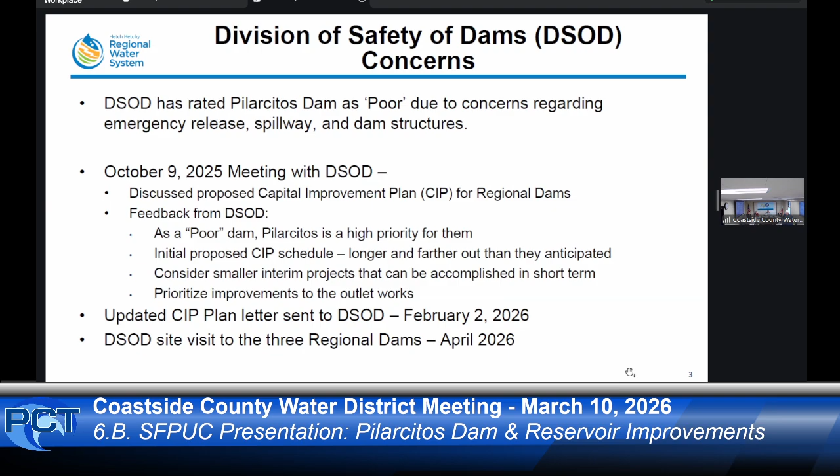You don't have a particular interest in San Andreas, but it's basically in the hills above Millbrae and Burlingame. The only way we can move water out of that is through what we call a blow off, which means it goes into the urban creeks down there. So we think we should do a project there, but it's going to be a small project because you can't put that much water down through the urban areas on that side.

For the Pilarcitos Dam Outlet Works retrofit project, I'll talk about that in a little more detail in a second. On the Turner Dam, we actually have to do some additional studies to get information there. But you see for the Pilarcitos Dam Outlet Works retrofit project, it talks about a 7-year timeline to get to construction, and I'll address that in the next slide, because even that feels like a long time. But capital projects do take a long time in many cases, so we have to deal with that.

The long-term projects stretch out all the way to 2052. That's the nature of our capital program at this point in time, part of trying to keep our rates affordable for all of our customers, including all the wholesale customers and the retail customers in San Francisco. Next slide, please.

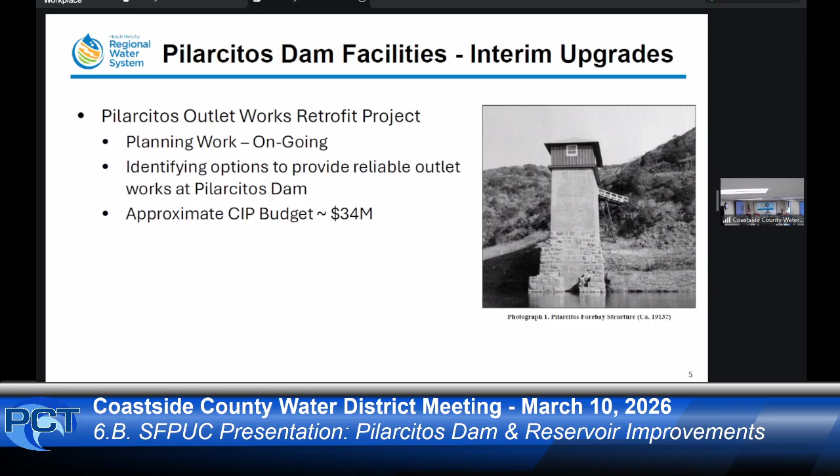For the whole long-term project, we are in the planning phase. We are evaluating the downstream conditions, because downstream of Pilarcitos is Stone Dam. So the operation of our dam or both our dams, operating Pilarcitos in conjunction with Stone Dam, is a key part of this in terms of stewardship of Pilarcitos Creek, so we need to take that into account.

We've got two basic alternatives that we have developed for Pilarcitos. One, which is the preferred alternative for us, is basically to accept a permanent reservoir restriction of some sort. Right now, the water level is restricted by about 20 feet. It can go up during wet weather, but you have to bring it back down to 20 feet lower than normal.

So we would accept some kind of restriction on the reservoir level. We would lower the spillway, and we would have this new discharge outlet to Pilarcitos Creek, which is what I was talking about as the interim project. The approximate budget for that would be about $190 million. That would have the least construction on the dam, since dam construction is the most expensive part of these projects—so this would have minimal construction cost relative to any work on the dam, because it'd be restricted to the spillway area.

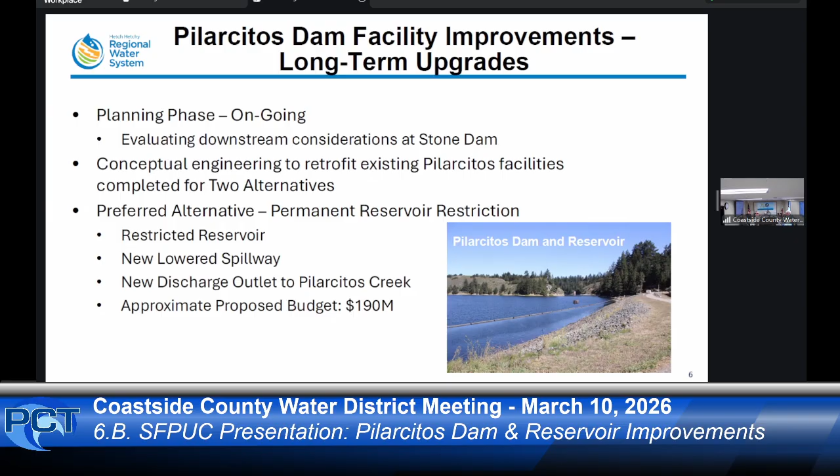The second alternative is basically new facilities—a new dam embankment, a new enlarged spillway, and again the same outlet works through the dam abutment.

So the approximate budget for that is in excess of $350 million. When you're rebuilding a dam, it gets really expensive. We had experience with that recently with Calaveras Dam, where we had to rebuild the dam, and that was a very expensive project. We're quite happy it's done, but it took a lot out of us in terms of money, time, and energy.

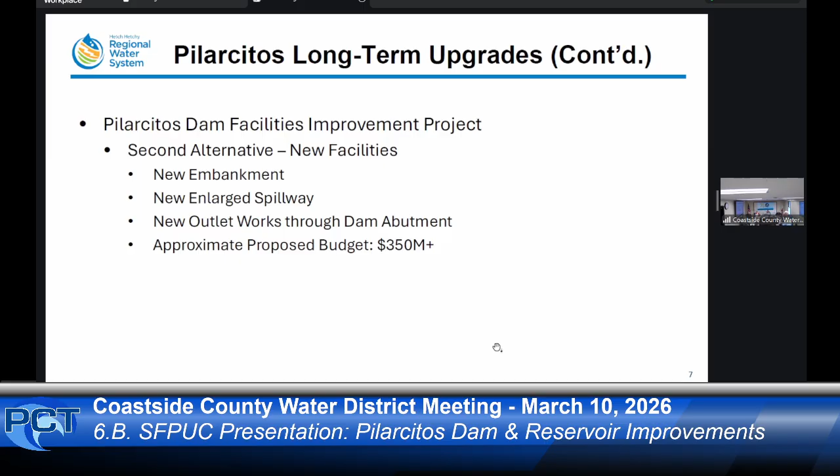I think we're going to know a bit more after we have the DSOD folks down in April to look at these facilities and talk through our proposal and the alternatives with them. Hopefully we will get to a place where we can move forward and take action as soon as we can on the new outlet works and move on to the bigger project overall.

Current operations, we currently have the restricted reservoir elevation. If we can get the outlet work cleared up, we might get some relief on that, but it's not going to be total. So we're going to be living with the restriction for as long as it takes to get the bigger project done. I think we've done a good job so far in improving the two siphons there for stream releases.

We're hopeful that will continue to serve us well as we go forward. You can see the two parallel pipelines go out into the reservoir, then come over to the spillway, go down the spillway, and dump into the creek down there. That seems to be working.

We have been in contact a lot with National Marine Fisheries Service, and they seem satisfied currently with the way the operation is going. So I think we're in a relatively good position for environmental review as well, but that's always a bit of a crapshoot as you move forward. That's the last slide.

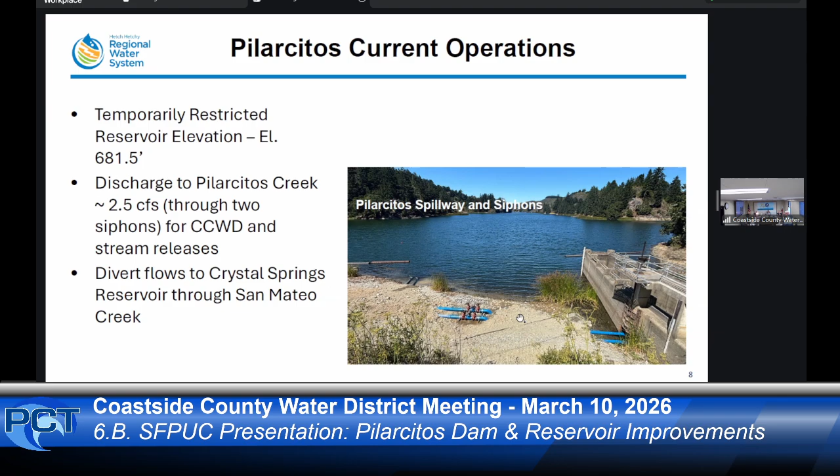Happy to answer any questions. Are there any questions, please, from the board?

The historical significance of the Leaning Tower of Torrecitos, as you might call it — was that determined by an architectural group, or how does that appear? Is that just someone looking at it, or?

In the world that we deal with, anything older than 50 years is historic. So I think the board is primarily historic, I think we're all historic. But those are the things that we have to deal with.

The structure was built in 1913 by the Spring Valley Water Company. I think all of our assessments would clearly put it into the category of a historic structure that would cause us to need to consult with the State Historic Preservation Officer.

The construction of that particular tower really predates formal engineering — it sort of looks like the masons showed up and mixed up some mortar. And it looks like it did, but it survived... well, it didn't survive the '06 earthquake. It survived the '89 earthquake.

One of the things I did ask one of our folks just yesterday was, if the outlet is down at the bottom of that, what's the point of the tower? She didn't have an answer off the top of her head, but I'm still pressed on that. I think it's sort of a fish review station, isn't it? I don't know.

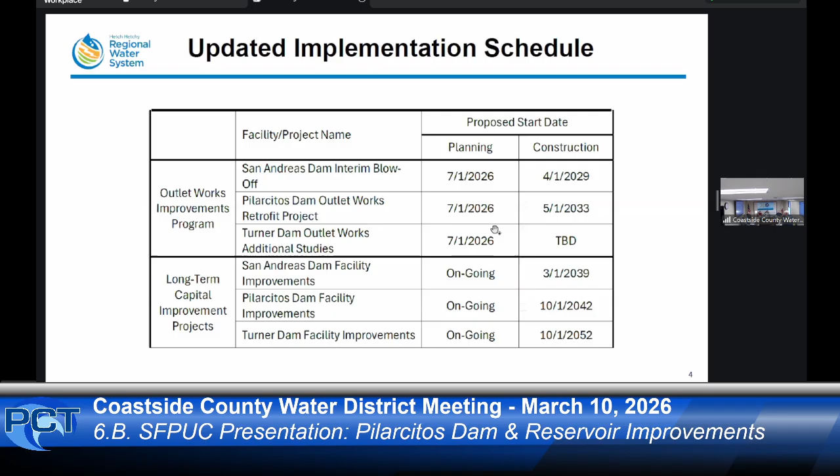Okay, and looking at the expenditures, being the BAWSCA representative, what are other BAWSCA members saying about this, do they have an opinion on the expenditure? No one has expressed an opinion on this expenditure to me. I see the case that could be made, and I'll leave it at that. Oh yeah, no, I think there's a real clear question of who's gonna benefit from this and how's it gonna work out, things like that.

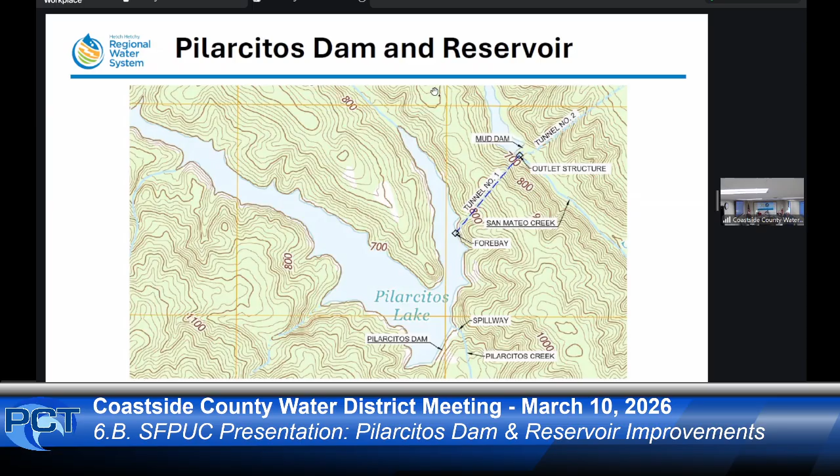There are two aspects to that. One, it's hard to tell, because they haven't seen all these things. Everybody knows it always makes a difference to see something in the flesh as opposed to just on an 8.5 by 11 sheet of paper. I took some of our commissioners up to see Mountain Tunnel, and all they'd seen was on a sheet of paper. When they got up there, it was like, God, this is a big thing. It's the same thing when people get out to see the physical conditions there. They will probably have a better appreciation for what we're dealing with.

The other aspect is just FaceTime with them. We'll be able to spend the day with them and delve further into what their pain points are. Just like I said, the clear pain point I heard was, we want to get rid of the poor designation, and I'm totally on board with that. That's gonna help us. Is poor the lowest?

Yeah, poor is the lowest. Well, below poor is failure. You're out.

The temporary restrictions presently in place will stay in place going forward. Once we finish the outlet structure, that will probably be our first good opportunity to revisit those restrictions and see if we can get a change made. And then the next would be as we progress through the rest of the project.

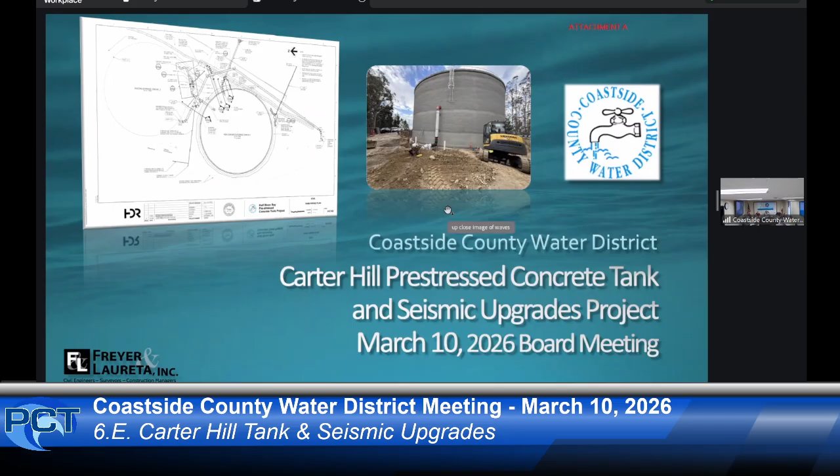Okay, item E, not to be last but least, but to be foremost as an important item on our agenda and schedule: Carter Hill Pre-Stressed Concrete Tank and Seismic Upgrade Project, number 17 update.

Time flies. I asked John to give us the presentation. It's been another busy month up there. As you come in, we have started to backfill, probably this month, so the drains are going in, and the electrical has started on the tank. The tank is in operation right now, it's online and we're using water in and out of it, though the permanent line going down is not completed, so it's still a little bit manual. But Darren and I anticipate early next month it'll be online completely.

There's some key things that happened this last month: obviously the fill up and disinfection, we did the water tightness testing, tested the overflow, and they are putting in the communication conduits. The 20-inch and 24-inch line has been coming up and we're probably about two sticks away from turning in and heading into the effluent of the new tank. So it's a slow moving process because it's very tight up there.

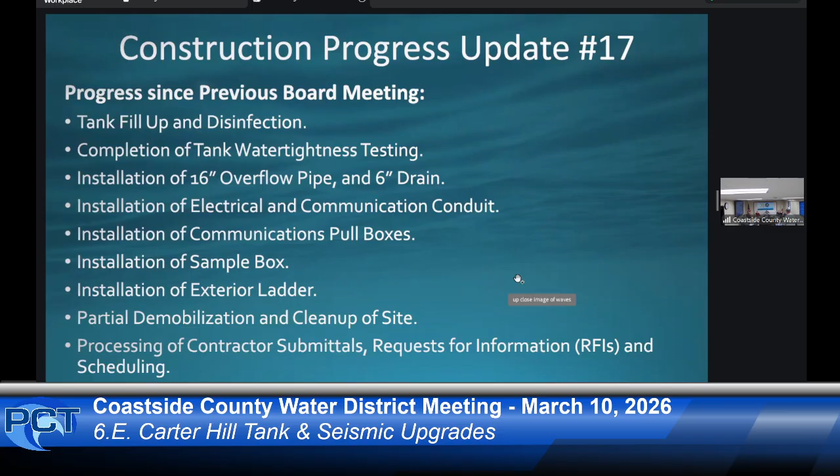You'll see the pictures. I think that's all the updates for this month. There's a lot of construction going on, and by next month we will have where the ladder will be able to be used because the backfilling will be complete. So if you have any questions about the pictures, that's everything, we're here to answer.

July completion is still assured. And we're working toward that as a milestone month and timeframe for some acknowledgement of the completion. That's all I was trying to make sure we're in good form, that's all, not trying to do anything else.

Could we go to the other photograph? There were two pages. Yeah, there's three. Oh, three, okay. There's one that shows a bunch of shoring, I think kind of on the left side. So maybe it's the other one.

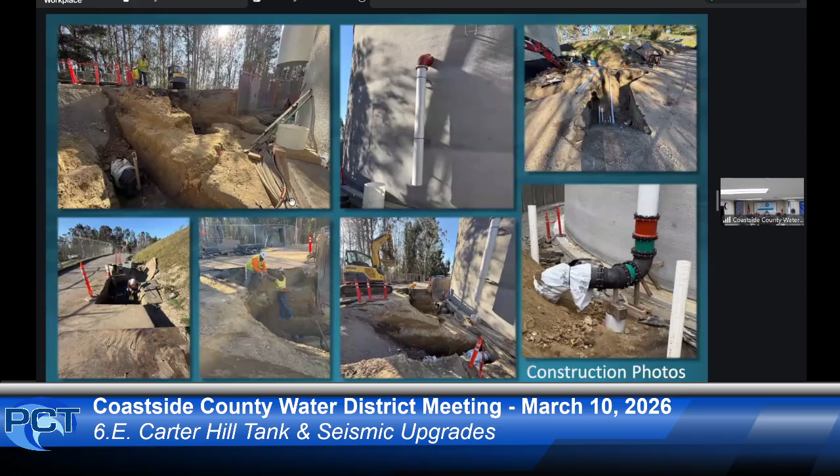Could you go to the one right before that? Yeah, number two, this one. That shoring is going to remain? No, it comes out. And will all that be backfilled then? Yes, so you can see the edge of the curb here.

And there was another picture that showed the drain going around, but we have two drains: we have the leak detection drain, and this membrane right here, a monolithic membrane that goes completely underneath the whole tank. And what they've done, can you go to the next slide?

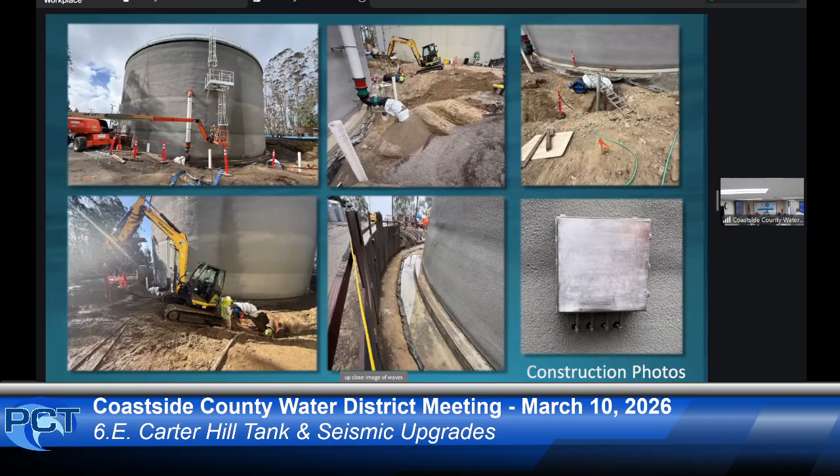Thanks, Lisa. Sorry for jumping around.

This is a better view. They've put 2 pipes that go around, one on the inside, and then this membrane gets folded over like a burrito. That's a leak detection for underneath the tank and the bottom portion of the tank that is buried. Then there's another one on the outside that picks up any groundwater or anything penetrating through the soil.

So that's what they're doing, but they'll get that in, backfill it, and next month we'll be reporting that to you. Then all the electrical and communication conduits will go in, and that'll get filled up all the way to the road, and they'll pull the shoring as they go. Once they get under 5 feet, they can start pulling the shoring.

It's a possibility those I-beams might be stuck, and they just cut them off. With Ranger, we got them all out except for one behind the basin. They're gonna try to pull them, they're too expensive to just leave. But if they can't get them out, they leave them, I'd say about 20% of the time.

If you were to point to the side of the tank there by the white hard hat, how high will it be filled? You see, it's kind of hard, but that red mark right there is the ground level. That's a great piece of tape. When they fold the fabric over and they put the drain in, that's to find if there's a leak coming out of the tank.

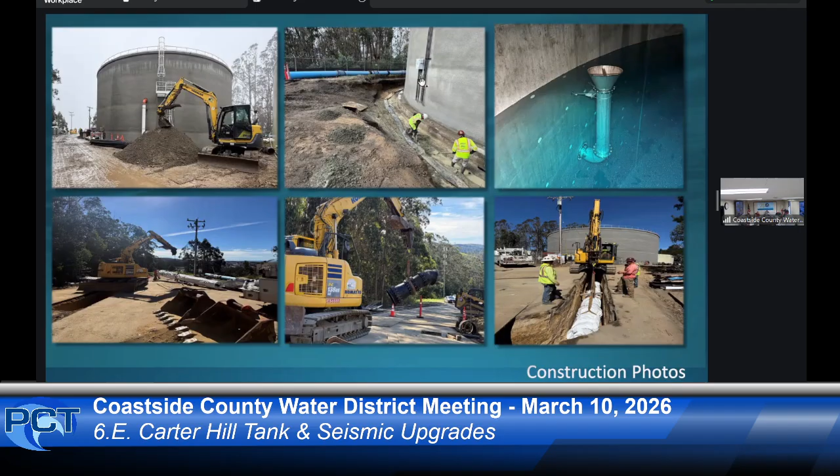May I summarize? Director Coverdale has asked a very germane question, which I guess the staff has also been considering and concerned about. They're going to take the momentum going forward to make sure that whatever needs to be done will be done to prevent any surprises or unplanned events from occurring in this new, massive, expensive tank, and they'll get anybody involved who they need to make sure that we're covered.

Is that a fair statement? I'm just learning about all this stuff. Bring it back to you next month. It's good stuff, and we need to be sure that we are watching this.

Now, when this new tank is done at the end of July, whenever we plan to do this, it will be pristine, ready to rumble, ready for exhibition. We'll be able to show it off and tell people this is really the best thing since sliced bread. We have made this the best it could ever be, and we are very proud of what we've done.

Is that correct? Is that what our intent is? I'm counting on you guys to make sure that's the story, and that we are absolutely 100% honest about it. That's all I need to know, because this needs to be presented in that way, and I am really looking forward to it. So thank you, keep it up.